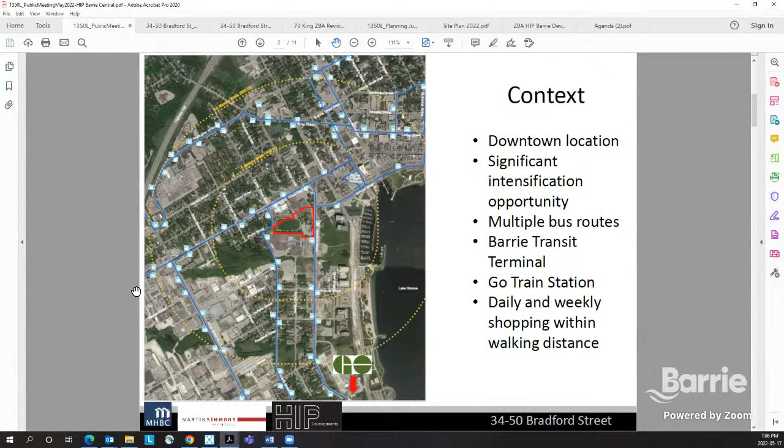In terms of context, we're talking about the area shown in red at the bottom of the site, a total 7-acre site. We're looking at about 630 units, 1 and 2 bedroom units in the two towers, with the shared parking podium. What was really important to us here is having an active podium, having units all around the podium. So not just looking at a parking garage, but activating Bradford, activating the Simcoe extension, activating the rear of the site, and activating the south side of the site.

We've got residential units, including those on Bradford, having that active pedestrian realm where there are actually some units you can walk into directly. They'll also have rear access as well within the building. We've had attention to architectural design, not just through the towers but also through that podium, with different textures. Another feature will be the parkette, recognizing the ruins from Prince of Wales and having that incorporated into a parkette. That remains a part of our proposal here.

Another feature, certainly for the residents, will be the level 6 podium. It'll be a terrace with about a half-acre park for residents as well. We're finding that a lot of people, certainly accentuated through the pandemic, want to get outside and enjoy it, so people move into here to get their own private backyard on that terrace level. That'll be a big feature of this site. We'll have about 900 people moving into these buildings to support the local businesses and really activate this area. Active podiums, street frontage, all very important design considerations, along with the parkette and green space.

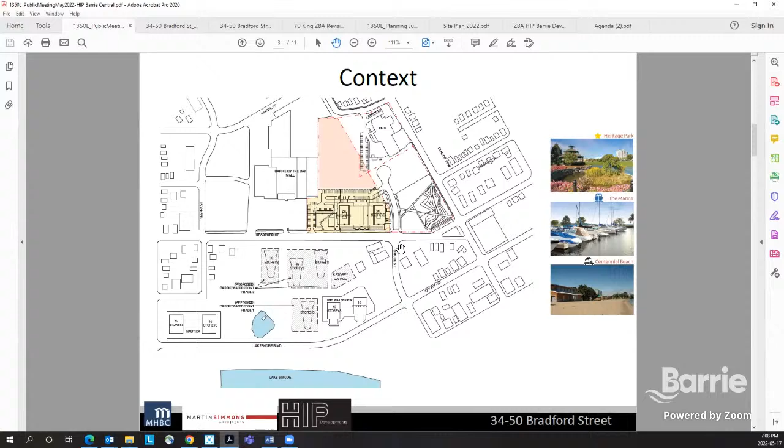So I'll turn that back to Trevor, who can walk through the application.

The project has 630 units, as Joel noted. The intent is that there will be units wrapping all the way around the podium, so that the parking is contained centrally within the structure. The building masks the parking all the way around, and in total there's going to be 491 parking spaces for the project.

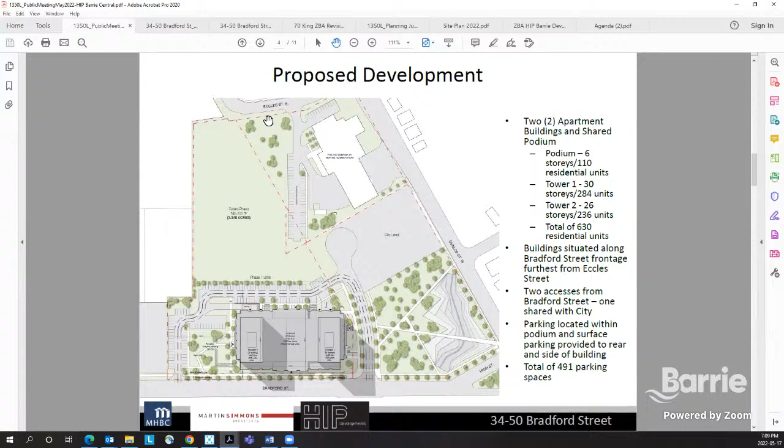We have the retained school facade on the south side with the parkette in behind. So we have a street wall, a continuous street wall with active uses, residential uses, lobbies, as well as the parkette all the way along the frontage.

And then we have narrow towers facing the street with eyes on the street from the balconies, different articulation with vertical and horizontal separation and a defined roof line.

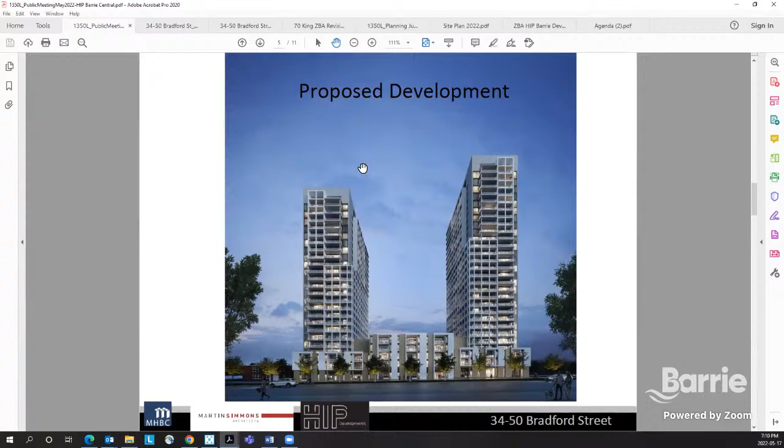And then we see the sort of angled roof line to create an attractive skyline with lots of glazing, lots of balcony opportunities, and ways that the massing is clearly broken up from the base, then middle sections, and then a defined roof line.

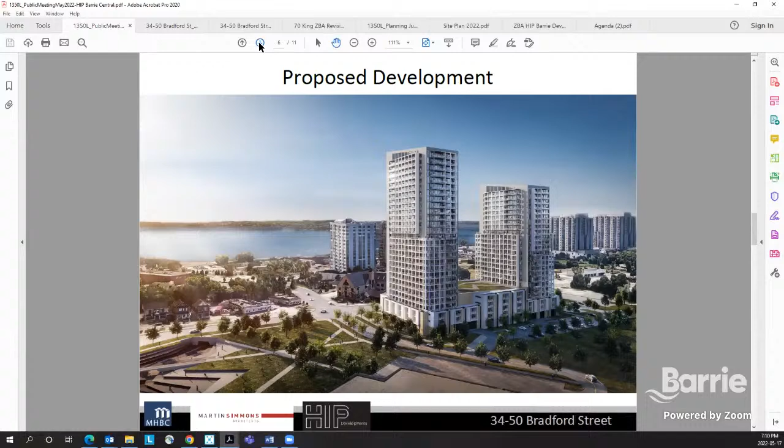Residential development at medium and high density is encouraged in order to increase the resident population in the downtown. That was one of the key objectives of the project, was to bring people into the downtown so that we're supporting the local businesses and activating this area on a 7-day timeframe rather than just during the work week.

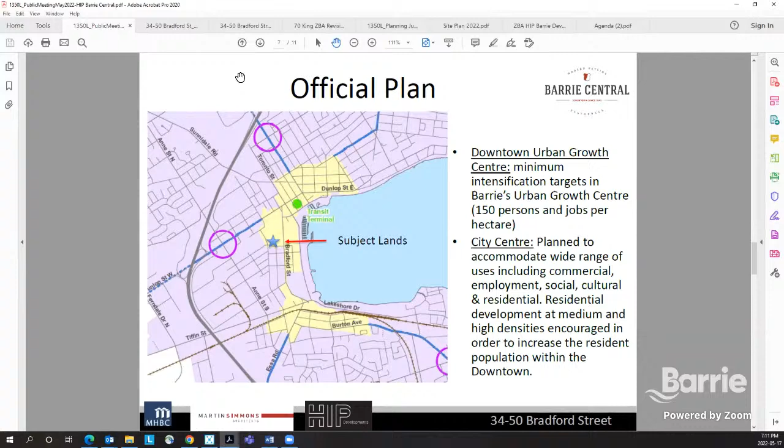Commercial uses are permitted, but under the site-specific, they are not required. And parking is required at 1 space per unit for the residential and not for the commercial.

The zoning bylaw amendment in front of committee this evening is to seek an increase in height for the two buildings that we saw earlier, to go from 70 meters to 86 for the building on the south side and to 101 meters or 30 stories for the building on the north side, and then to seek a site-specific parking rate of 0.78 spaces per unit.

There is a holding provision on the site today, which requires a record of site condition. That record of site condition has been submitted and acknowledged by the province, so that was accomplished in 2021 and has been satisfied. The original project had multiple buildings, a parking structure as well, and so there was going to be a requirement to stage the construction of that development, and that's why that requirement was in.

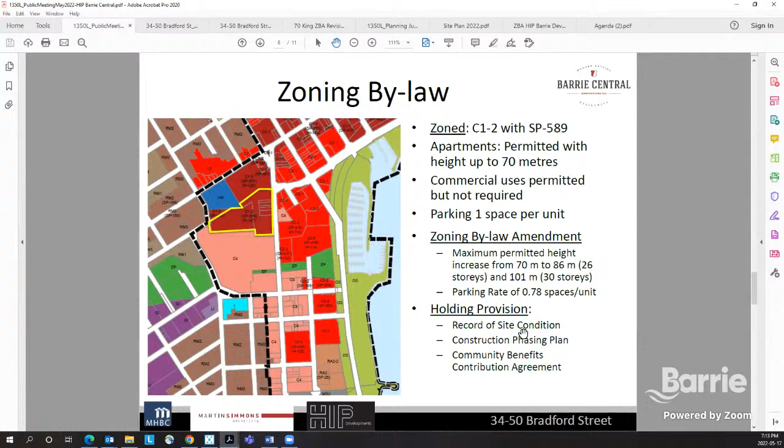There were questions about the phasing, as the site plan notes this is phase 1, and the back portion of the site would be phase 2. We discussed with the community at that meeting that the zoning that's in place today permits residential and commercial development on the entirety of the site, and that phase 2 would be advancing at some point in the future, but the intent would be to locate the tallest buildings along Bradford Street and then use the depth of the site to work on transitioning as we get closer to the Eccles and Perry area in terms of built form and massing.

There was an expressed desire to create a pedestrian connection from the Eccles Perry area through the site to Bradford Street.

We've accommodated pedestrian movement in phase 1 through the site plan process. In phase 2, we'll look at ways to make sure those two phases are connected, making a connection out to Eccles and Perry so there can be movement from that neighborhood down towards Bradford Street. There was an expressed opposition.

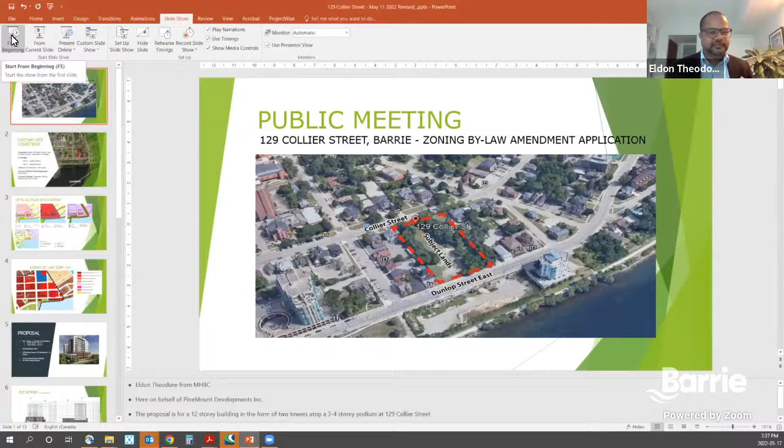So as I mentioned, my name is Eldon Theodore. I'm a partner with MHBC, the planner assisting PineMount Developments Inc. on this application. The proposal before you tonight is for a 12-story building in the form of 2 towers atop a 3- and 4-story podium at 129 Collier Street. Mark Sim from PineMount Developments is also here tonight should there be any technical questions that I'm not able to answer.

For a bit of background, these subject lands are located south of Collier Street East, north of Dunlop Street East, a couple properties east of Poyntz Street. It's approximately 0.61 hectares in size, currently vacant. It has frontage on both streets, representing a through lot opportunity, and the property slopes downward as you move from Collier to Dunlop, closer to the bay and the lake. The property is designated city center and zoned Transition Centre Commercial C2-1 zone, which I'll go into in the next slides.

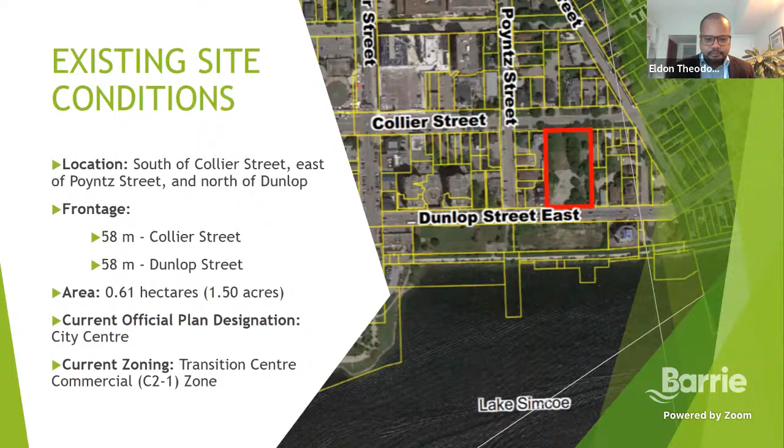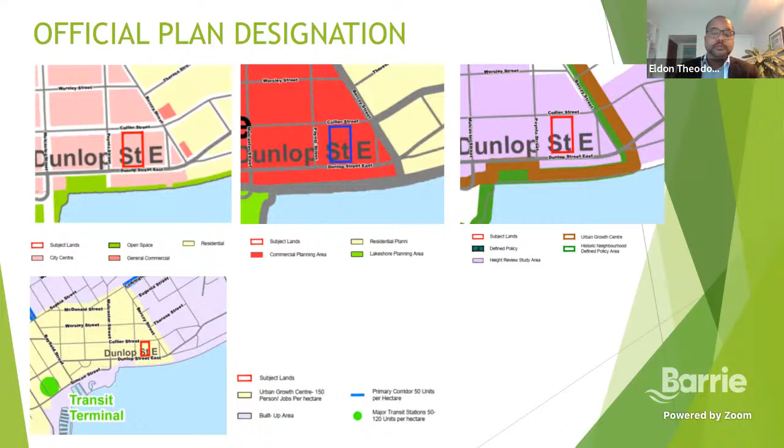The official plan designates the subject lands as city center and commercial planning area, both of which permit a broad range of uses, including residential in a variety of housing forms, with medium and high density building forms encouraged in the city center. Subject lands are also in a height review study area, meaning additional evaluation of height and density from a block planning perspective is necessary, which has been considered in our application. The lands are also within an urban growth center, a location where growth is to be focused through intensification in a compact urban form. This confirms that the downtown, the city center, is an appropriate location for greater height and density in a compact form to meet the city's growth objectives.

As I mentioned, the property is zoned Transition Centre Commercial C2-1, which permits a broad range of uses, including apartment buildings to a height of 30 meters. The proposal is to retain the existing zoning category, the C2-1, but to request modifications to a number of specific provisions, which I'll go into a little bit later.

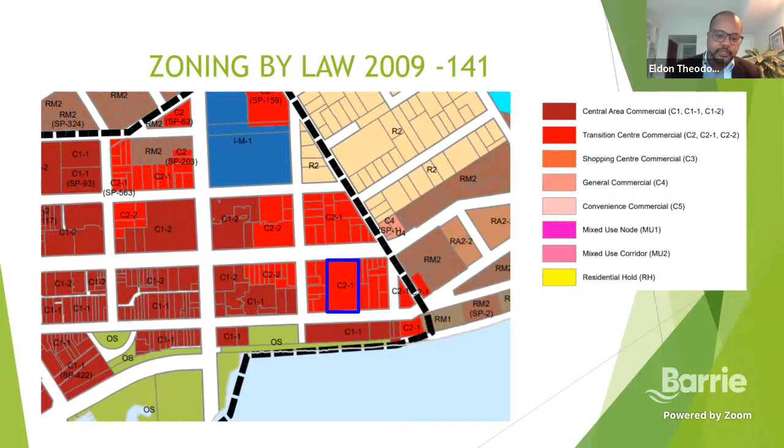From a design perspective, the proposal seeks to provide a strong base in terms of materials, such as a brick finish, as part of the podium to help anchor the building. As you move up, a lighter materiality is proposed, using glass as well as metal cladding that have a lighter composition within the skyline, helping to minimize the perception of massing. There's also an opportunity within the east and west facades along the podium to introduce murals or public art where the blank wall conditions exist, which is something we hope to explore through the approval process with city staff.

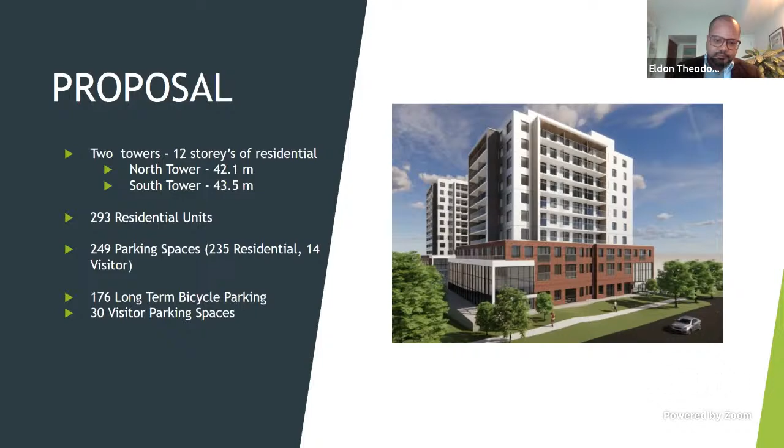This is a view on the left to the north, showing the elevation from Collier Street, and to the south showing the elevation from Dunlop. You can see that strong base perception, that red brick synonymous with many homes within the area, and as you move up, moving to that lighter built form. Even at the elevation to the south, the tower itself is inset within the podium to give the impression that it's almost tucked into it.

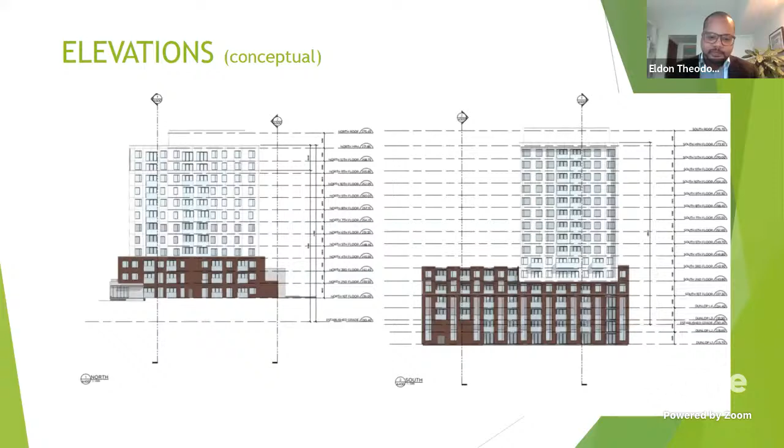We've also considered the block that the subject lands are within, evaluating how the proposal fits within the existing as well as the emerging context.

This allows for a more positive relationship in terms of built form along the public realm, with continuous street frontage and active frontage opportunities. All loading is managed internally, as well as parking. Loading and parking ramps are internal to the building, with parking underground or within partial portions of the podium. The podium itself does not show any parking from the street, as it's flanked by residential units.

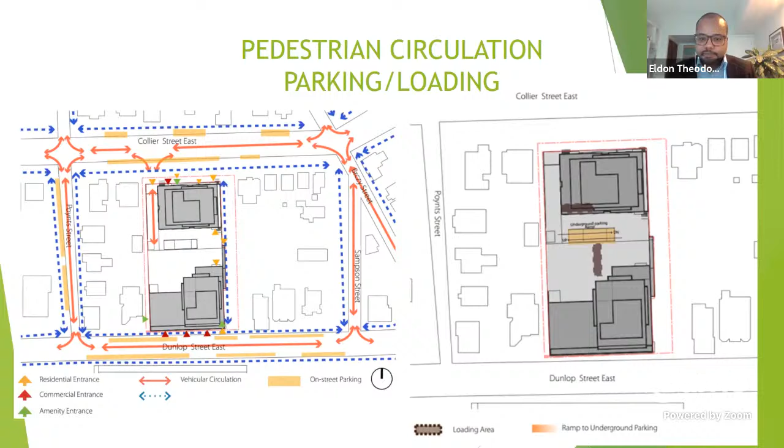Just a bit more detail on the ground level: efforts have been made to achieve ground floor animation through active uses, with the majority of facades having either residential units or residential access to the main building through lobbies or amenity spaces, shown in yellow, blue, and burgundy.

The service areas are mainly, for the most part, relegated to smaller portions of street facades and mostly internal to the site.

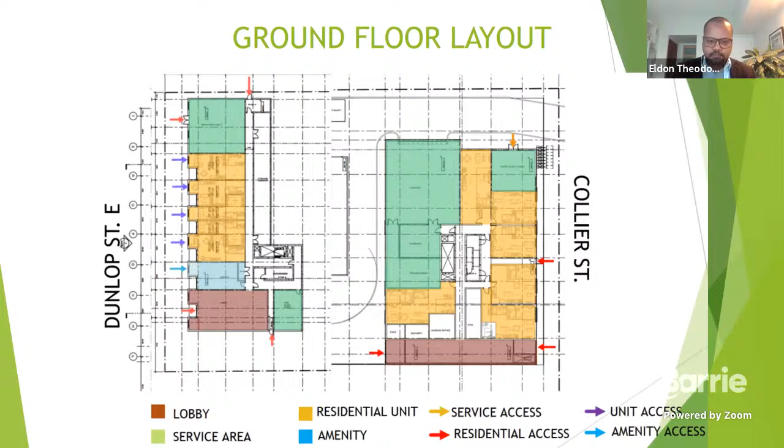In terms of the requested amendments we're seeking, the proposal is to seek a reduction in the side yard setbacks: 1.2 meters at the westerly side yard setback and 8.1 meters at the easterly side yard setback.

A building height of 43.5 meters, providing 0% commercial coverage, a minimum parking width of 2.6 meters, a minimum drive aisle width of 6 meters, and lastly a minimum parking rate of 0.85 parking spaces per dwelling unit.

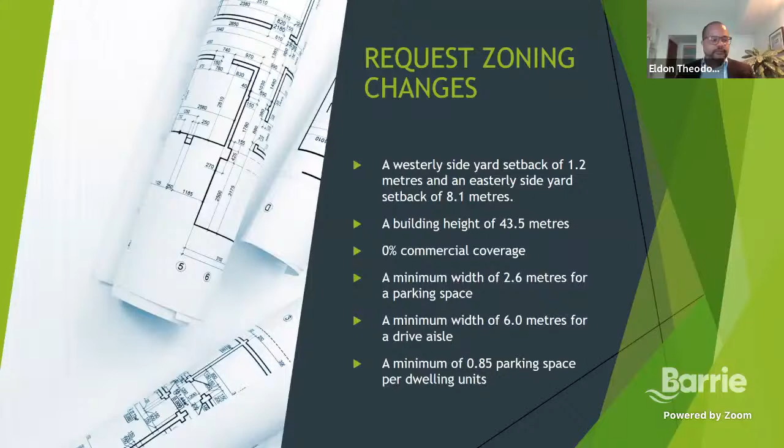To go over the rationale for some of these requests: for the setbacks, the proposed building, particularly the podium as you see on the left, maintains appropriate setbacks from the adjacent active uses that exist today, including to the west the existing commercial uses, the restaurant, and dental facilities, and to the east a more ample and larger setback adjacent to existing residential properties, taking those existing operations into consideration.

The proposal also achieves a superior setback as it relates to tower separation. Typical tower separation is 25, sometimes 30 meters; this proposal seeks a 32-meter separation between towers. This helps mitigate potential shadows, mitigate overlook, and protect privacy between towers, while creating a less crowded built form on the property.

The proposed height, as you see on the right, is just slightly higher in relation to the streets as the grades change across the site. So from Collier Street, we're seeking 2 additional stories, and from Dunlop Street, we're seeking 4 additional stories.

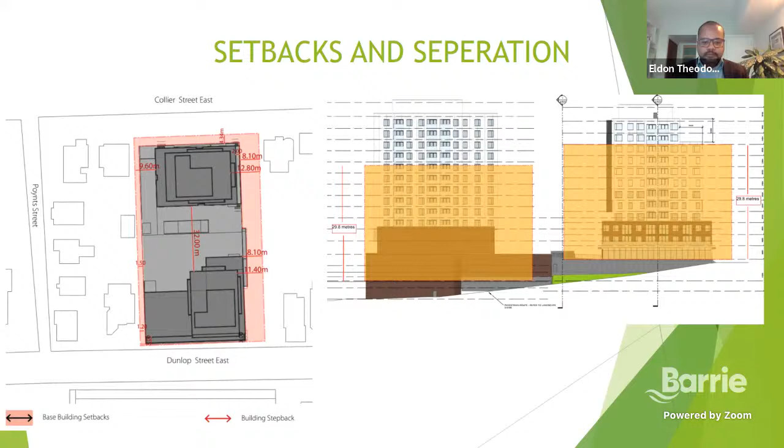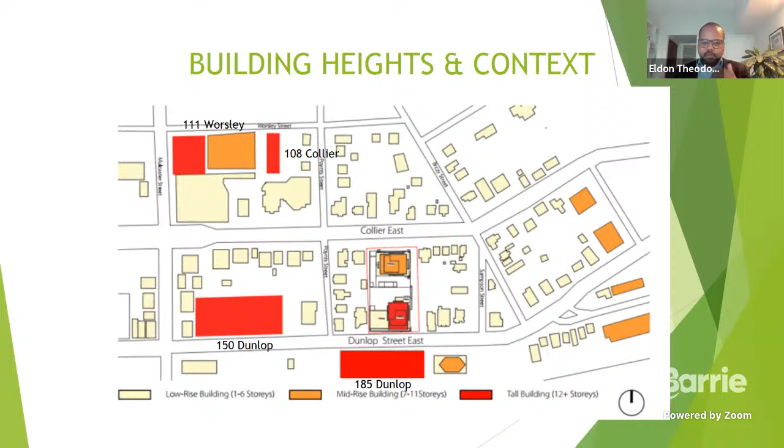From a context perspective, we see this proposal fitting into the range of tall buildings that exist and are emerging within the area, with a built form that transitions from tall to mid-rise in height moving down into the neighborhood itself.

We've looked at other applications proposed and under construction within the Growth Centre, and we see this application as in line with other proposed tall buildings under construction. Its height is actually quite modest compared to some of these applications, but appropriate given its location near the edge of the Growth Centre, forming a transitional height relative to the surrounding context.

And to the east, recognizing that we've requested 0% commercial coverage, this is in recognition of the fact that the subject lands are again at the edge of the Growth Centre, in a transition location from the downtown area.

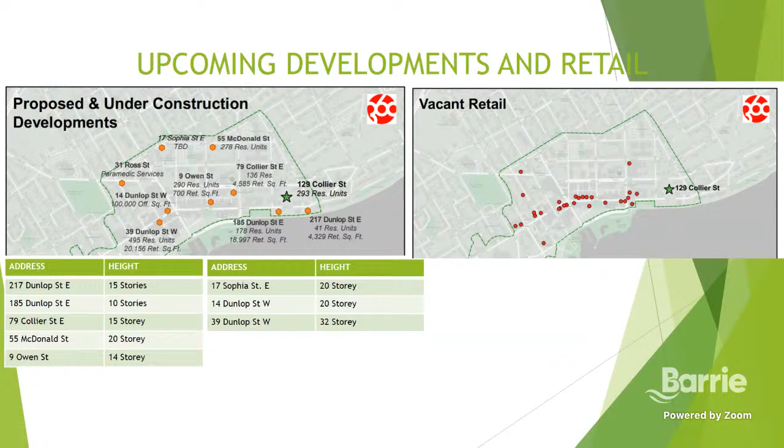Mr. Chair, would it be best for us to wait for Mr. Theodore, or should we continue with the presentation as is? You have a way to reach him? Yeah, sure, I'll give him a call right now. Please bear with me. Thank you.

Thank you, Mr. Chair, for your patience and everyone's patience today. Eldon is having technical difficulties, unfortunately. This is the reality of Zoom meetings today. But he said he would need a few minutes and he'll hop back on. Okay, great. Thank you very much.